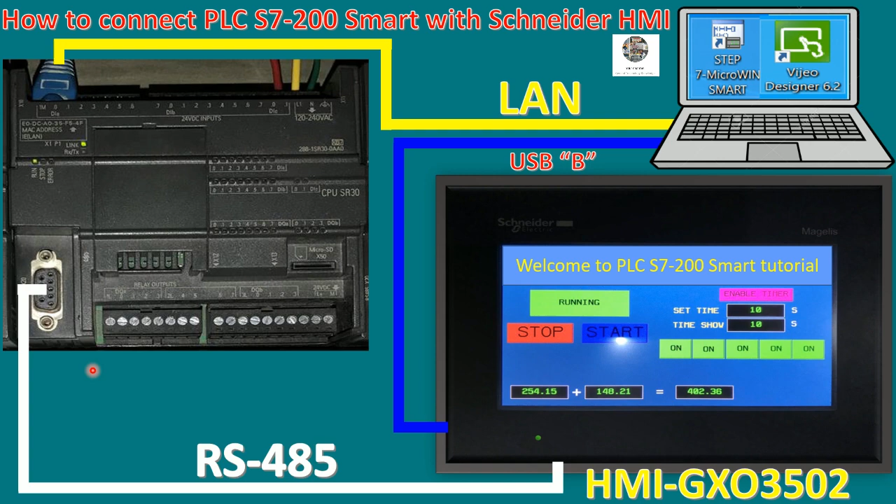For pin number 5, it is the ground, so we can connect with the resistance, and we use only 3 cables.

The first one is the ground cable, number 5, which we connect to number 5 on the HMI Schneider side. For this pin we use pin number 4 connected with pin number 8.

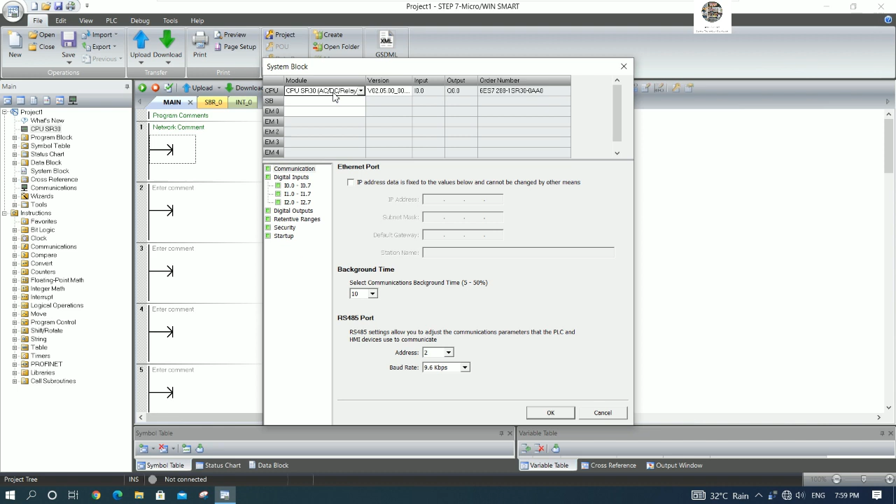Basically we can go to the CPU tab and then go to the startup tab and choose the run mode. There are 3 options we can use: the first one is last, the second one is run, and the third one is stop.

If we choose stop like this, it means that when we turn off the power and turn it on again, the CPU will not run. So if we choose run and then download the logic or setting to the PLC, when we power on, it will run.

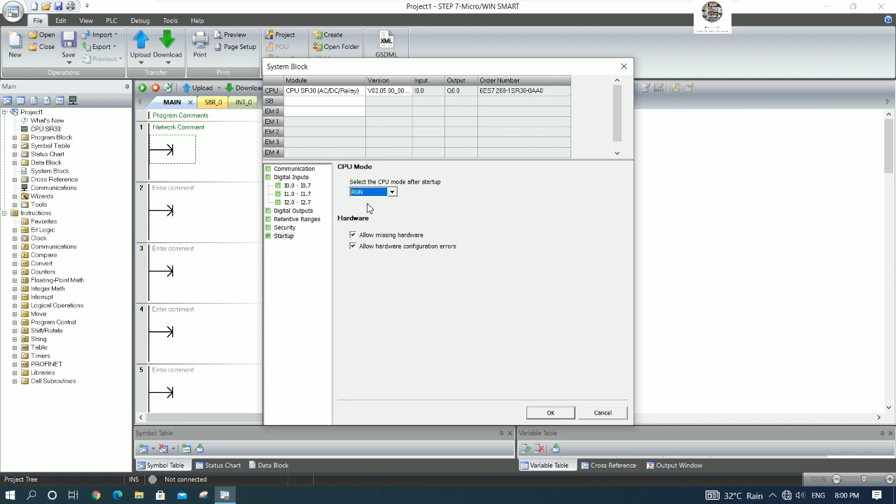For the last mode, it means the CPU will remember its last condition. For example, if the last condition is stop, when we power on and choose last, it will stop. When we choose run, it will run. So it means the last mode remembers that. For me, I recommend using run mode.

Then we can connect the LAN cable. I will connect the LAN cable from my PLC using the Profinet port to my PC, then go to communication and choose the correct network card that we already installed. I will choose the gigabit network connection, which is the network card of my PC.

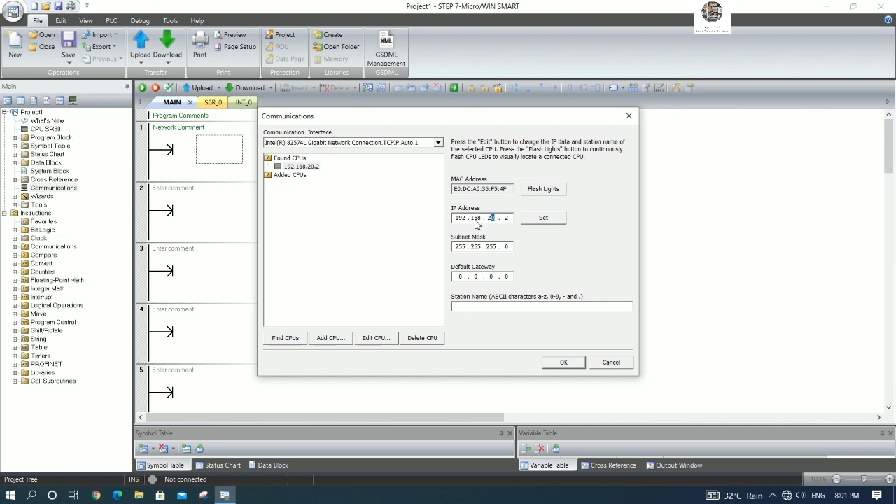So it detects 192.168.20.2. If we would like to change the IP, we can use edit and change it to another IP that we want, but right now I'm not changing the IP.

So we need to put the IP address of our PC to be the same range as the PLC. So I will put 192.168.20 dot something, but not dot 2, right? Because the PLC is dot 2. When we put dot 2, it means it conflicts with the same IP as the PLC.

So I will put 253. Push the tab key on the keyboard, and it will give us the subnet mask 255.255.255.0.

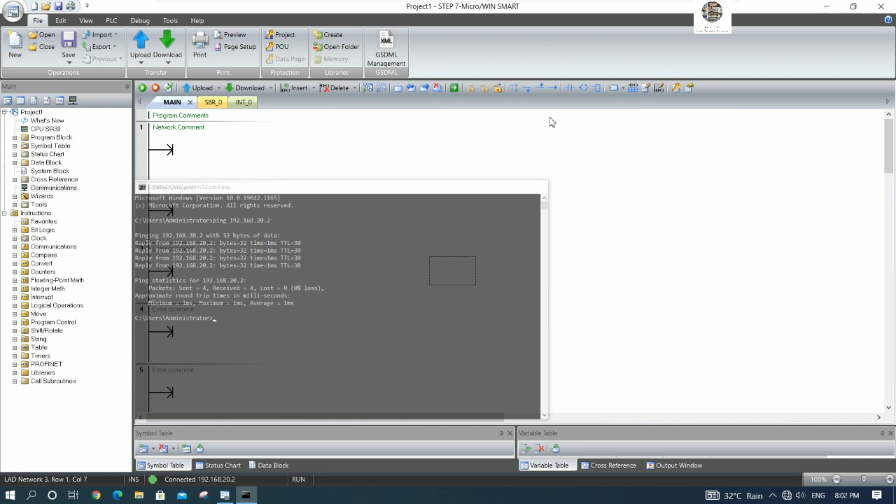After that we can click OK, and then we can ping 192.168.20.2. It's like this - it means that we can connect, or we can communicate between our PC and the PLC.

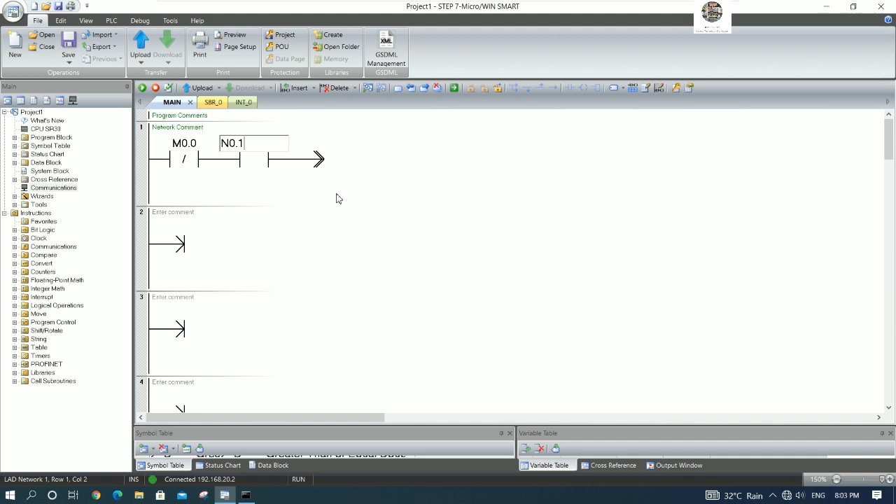So we can create a sample program to test with our HMI. The first one I will use NC M0.0 - sorry, this one should be M0.1. And I will turn on the output Q0.0. So this one is start.

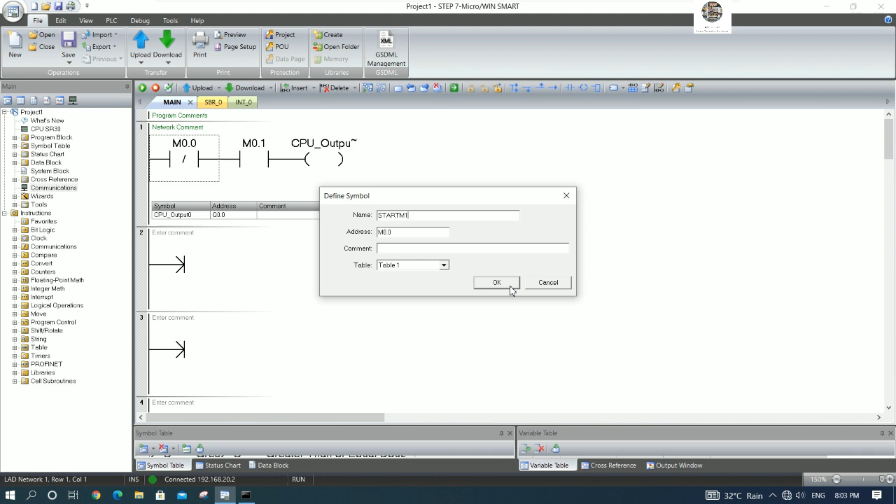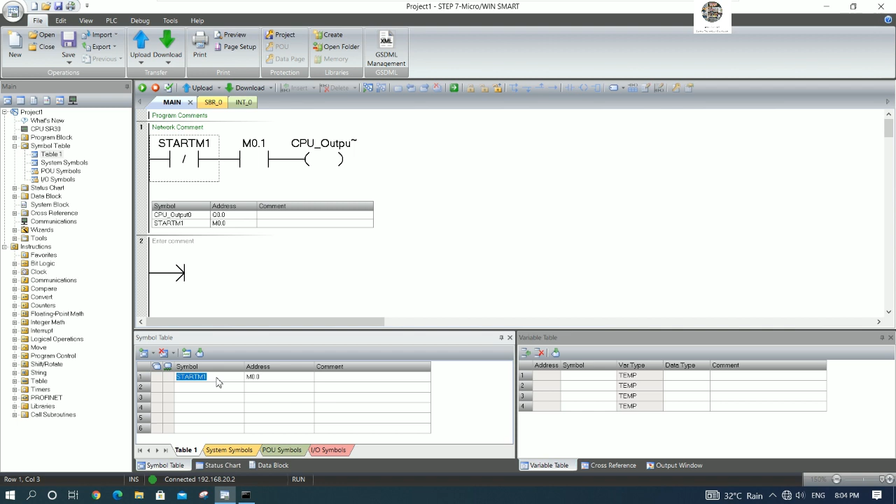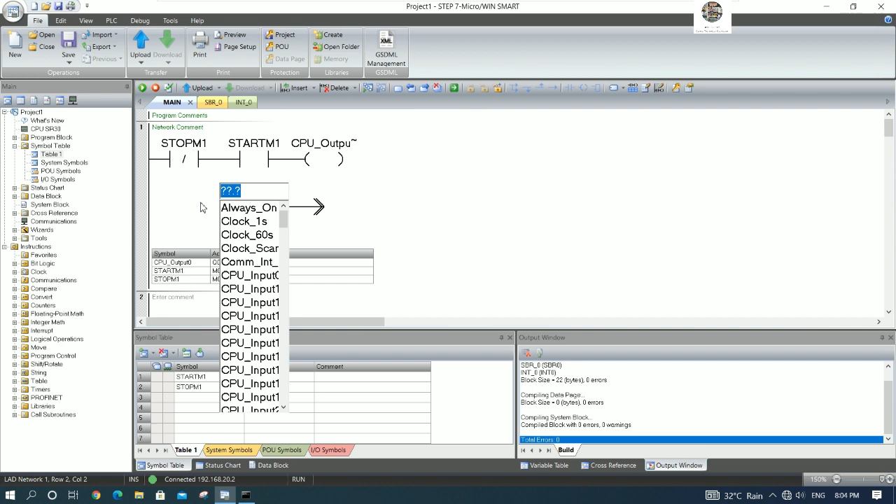So this one I will put start M1 - sorry, stop M1. We can go to the symbol table and then change stop M1, and this one start M1. Okay, and we can compile. Error 0. And then I will hold the signal by Q0.0.

And then we can save the project - this one, example PLC project. And then we can push download to download our logic to the PLC, and we can go online.

So we need to create a sample project for the Schneider HMI and then download it to the HMI for testing. Let's go open Vijeo Designer version 6.2. Then we can create the new project. I will go slowly so everyone can understand.

Push next, and I will insert PLC Smart HMI. Copy and push next. And here is the target name - I will put PLC Smart HMI connection.

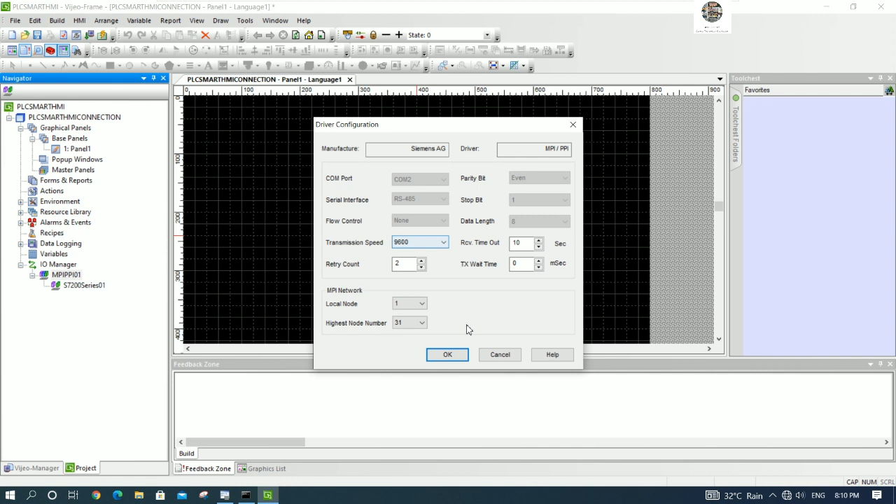This we can use default, so we can click OK. This setting is very important - if we choose an incorrect setting, we cannot communicate. First we need to know how to wire the connection, and second we need to know about how to use the baud rate. Right now I will choose 9600 for communication, and then we can go create the variables.

Go to variable, and then the first one we need to choose the boolean for the stop button. I will choose boolean, and here we can rename it, example stop M1. This is a scan group, meaning the driver that we already chose, and here is the address. So address we can use M0.0, right?

Next step we can use boolean, add one more boolean, example start M1, and the address is M0.1, right? So M0.1, you can choose this one, M0 bit 1. Okay, and the next we can use Q0.0 for motor number 1.

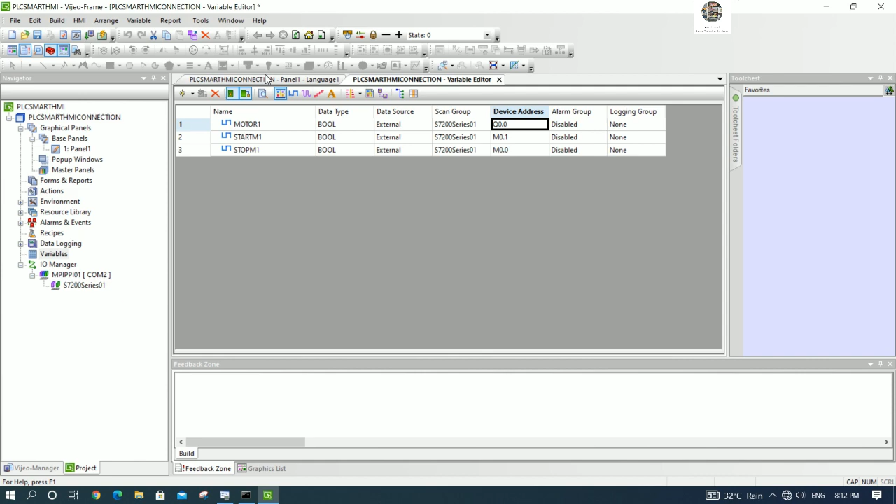So we can choose boolean, example motor 1, and then we can use Q0.0. Okay, and we can go back to our screen. And here we can change the color, another color that we want.

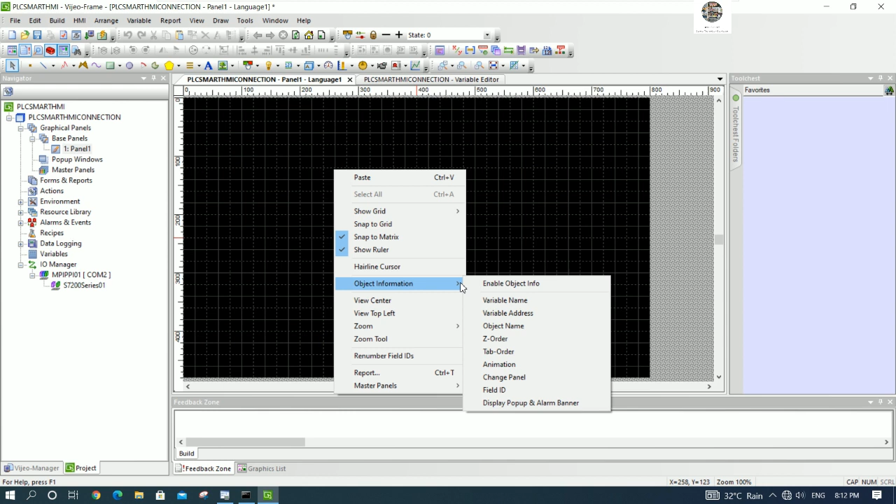So we can go to property. We can go to property, object property, right? Screen 1. And we need to set the download target that we would like to choose. So go to general tab and then download.

Here we choose USB. If we choose file system, it means that we can download to the USB flash or some drive that we want to download to our HMI. Okay, so right now I will use USB type B.

So it has one more option, and it is very important here: Include editor. It means that when we already create the project and choose like this, we can download to the HMI and then upload the project from the HMI back to our PC. Okay, so I recommend to tick this one. Next time we can upload back or back up the project from the HMI.

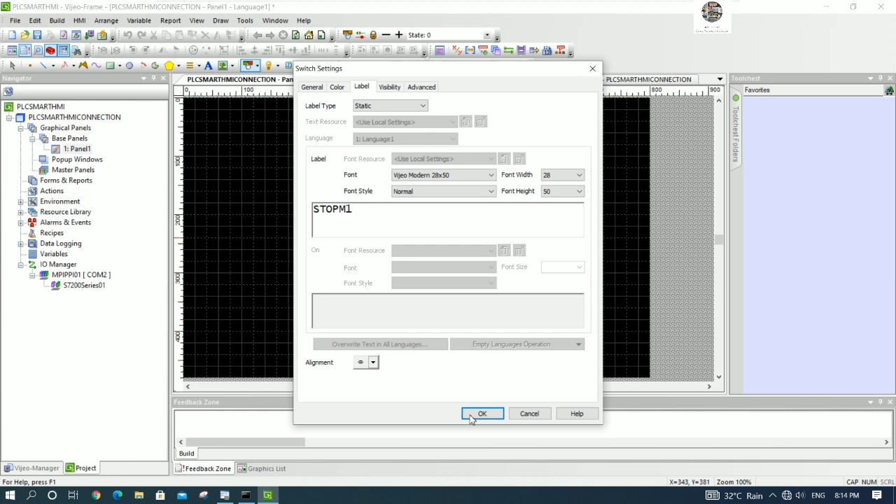Okay, and then we can go to push button, right? So let's go to switch. Label, example stop, stop M1. I will use this font size. It's very big, right? So we can adjust.

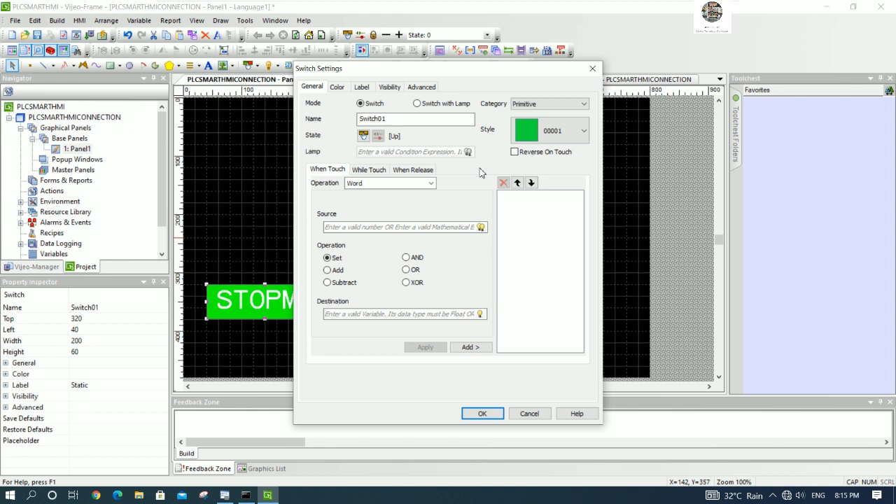Okay, stop M1. We can go to property, and then change the platform. Example, we use this color, we can go to change the color, right? For text color, I will use black. And fill color, I will use red because it is a stop button.

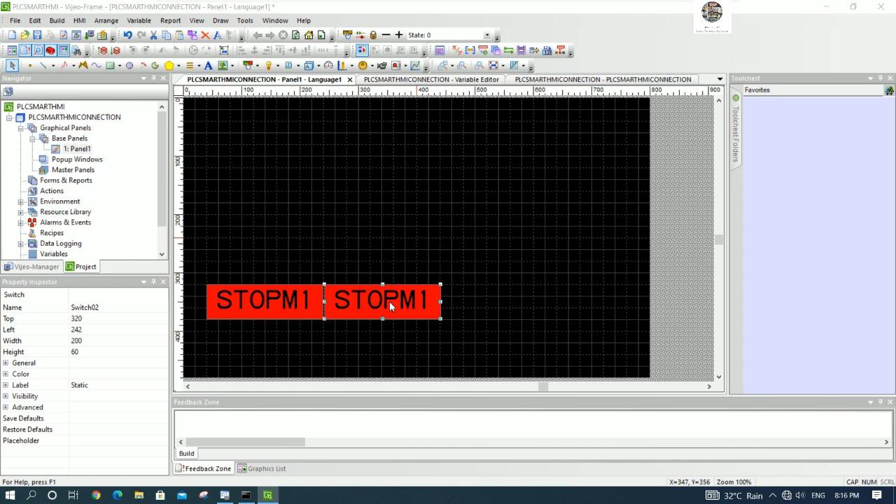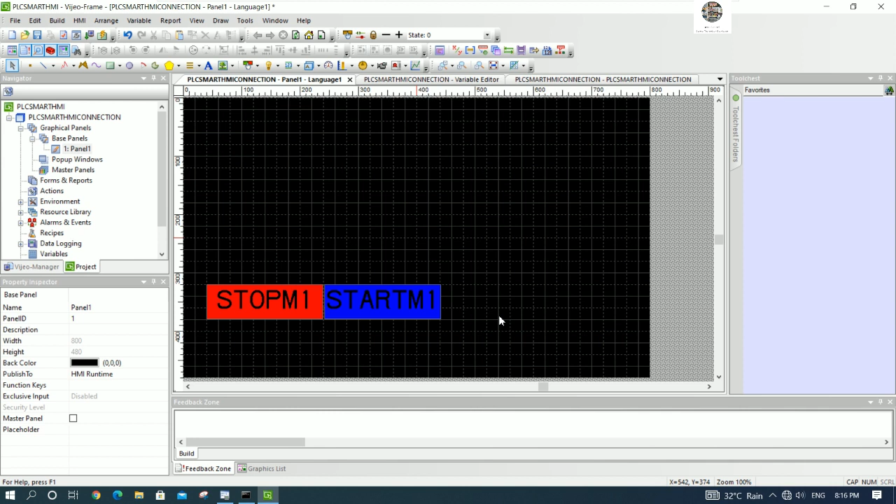And we can copy one more for the start button. Okay, start M1. We can change the label to start M1. And then I will change the color to blue. So we can change to blue. And for the background, we can change to another color that we want. I will change to this color.

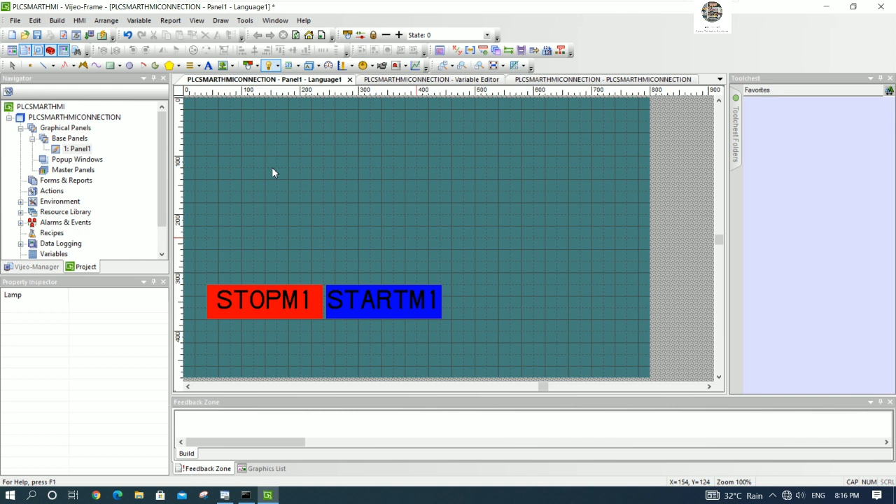And then we can use the rectangle to show the status of M1. Example, I will choose like this. But sometimes we can use the lamp, like this, to show the status. If we okay it like this, it will show like this. So we can change the color: when off it will be red, and condition on it will be green, like this.

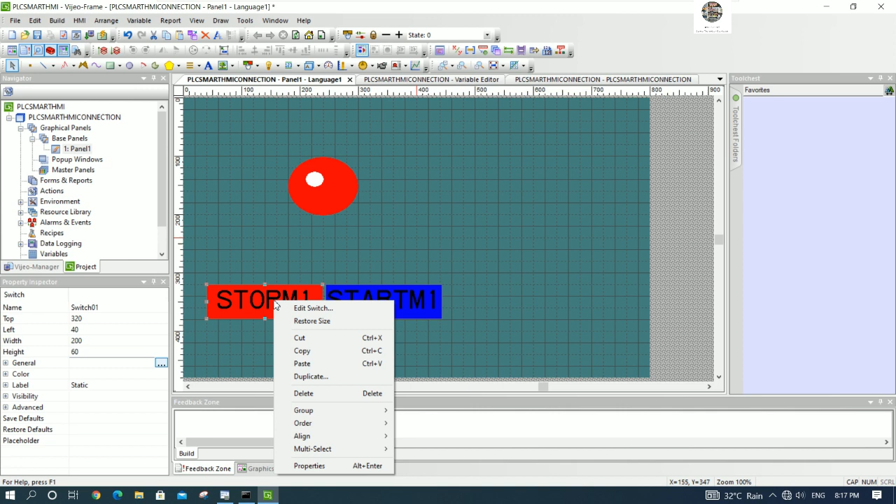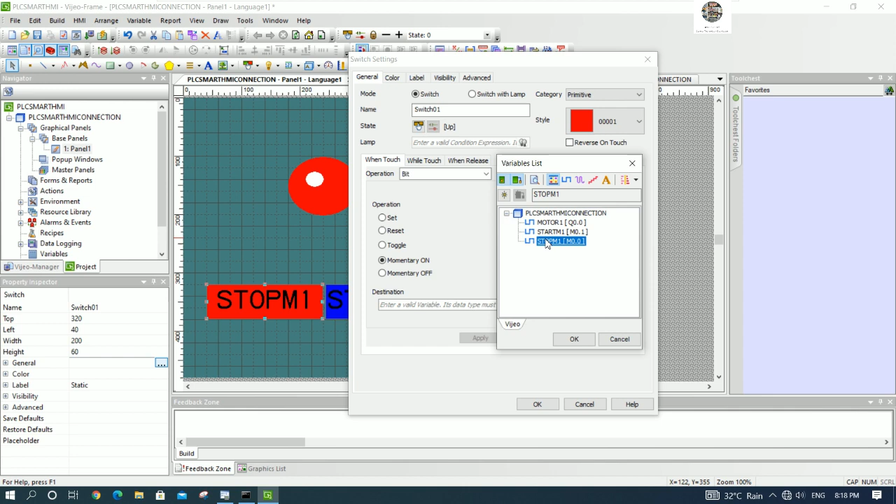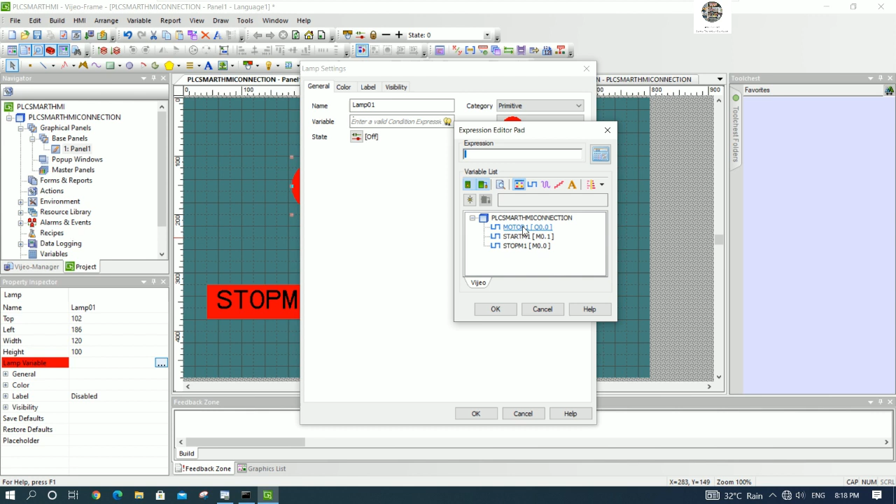Okay, so it is the motor M1. So we need to configure the start and stop buttons, right? We can go to property, double click, and then choose bit and choose momentary on, because we need to turn on, and go to destination, and choose the stop, right? And for start the same, we can go to bit, momentary on, start, and for this motor we can go to variables and choose motor one.

Okay, and then we can compile, right, and simulate before downloading to the HMI.

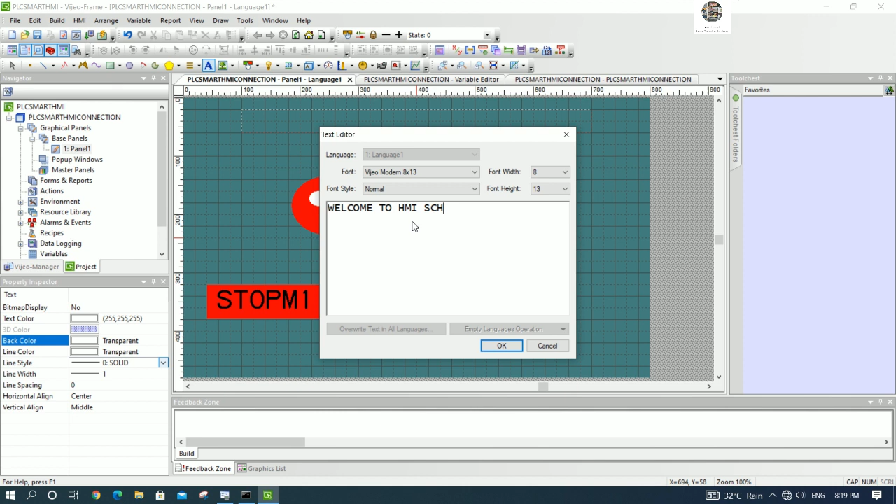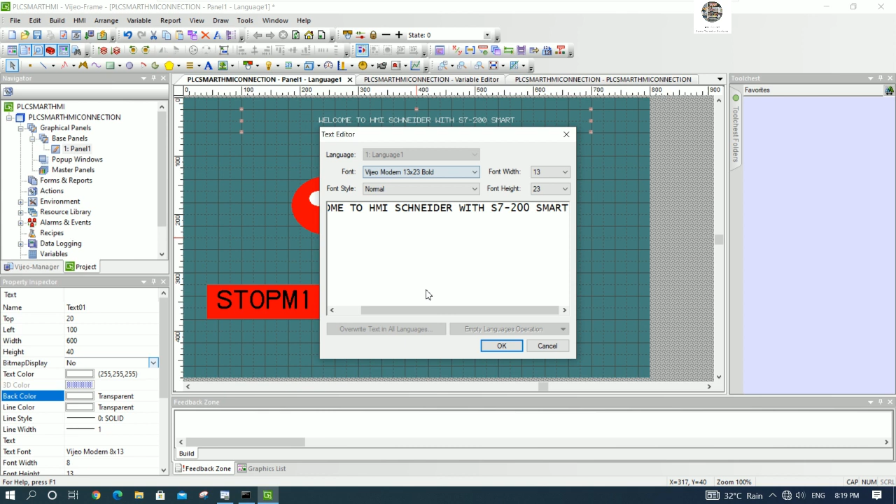So I will choose text. Okay: welcome to HMI Schneider with S7-200 Smart. Okay, and then we can change the color or change the font size that we want.

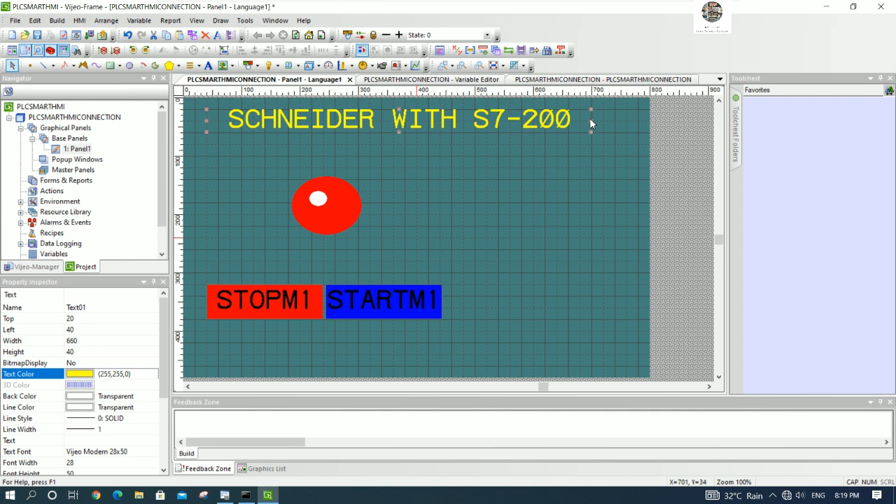The text color I will change to yellow. So big, right? So we can adjust. Okay, like this.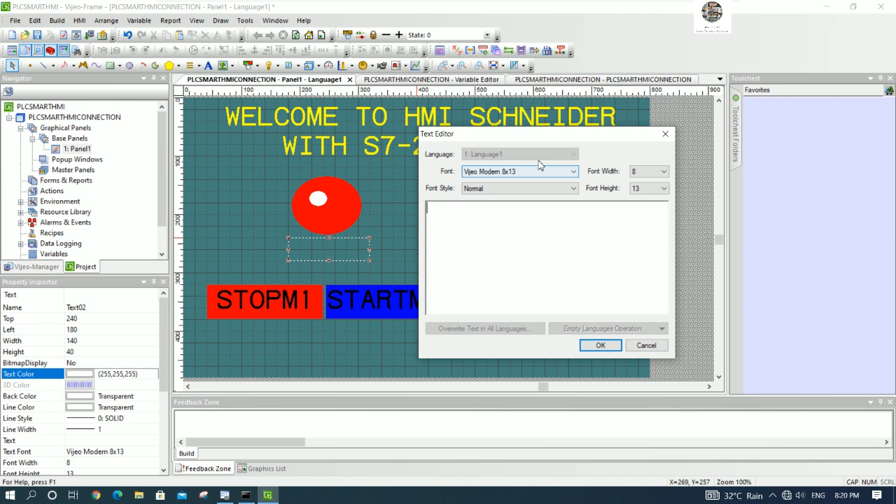Then this one should show the status of the motor, right? So I will choose the text. For the label, we can use the text, right?

Okay, here we can write the option. When the motor stops, we can show stop, and when the motor is running, it will show run. Yes. So we can go to enable the value animation.

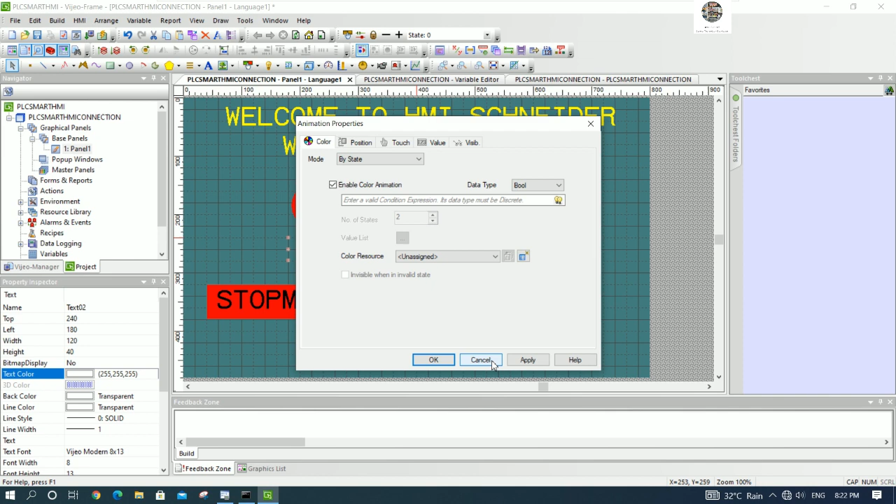Position, enable the position, the color, enable the color, it is boolean, right? Mode by state, by form, free form. We can use the value animation.

Actually we can use the rectangle. Okay, I will use the rectangle. Have option or not? We have size, we have touch, we have visible, fill, right? This one has style also. Actually we can use the text. Let me find the option.

Yes. Stop, normal is stop. And when it turns on, right? When it turns on, it will show running, right?

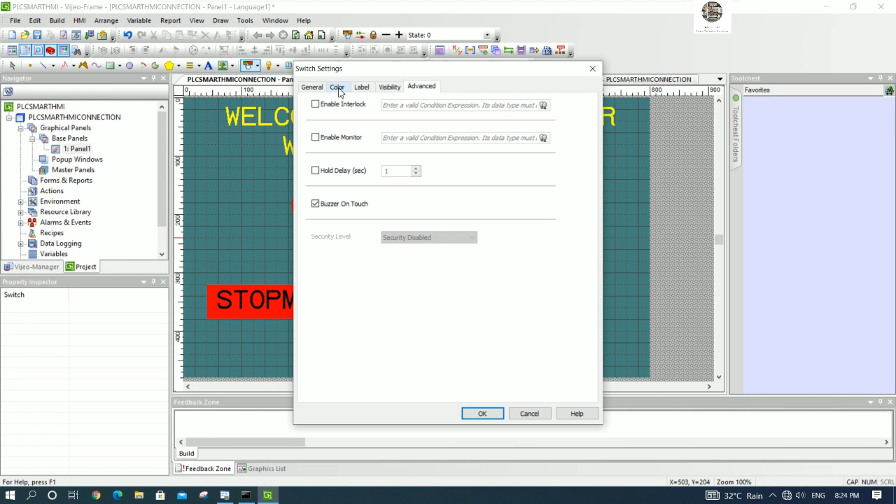Okay, so we can translate the text. I will use the label. Yes. And choose the font.

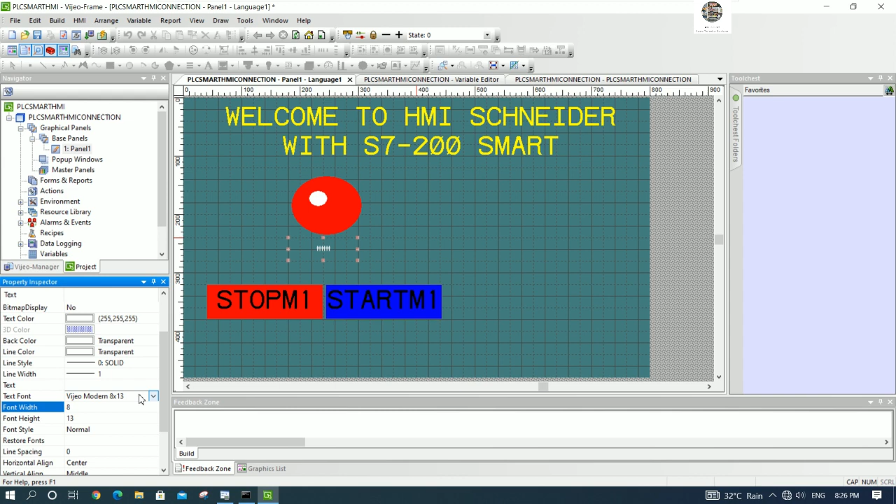It is stop, right? I will choose the font size, increase the font size a little bit. So double click on font size and then choose the value. Enable the value animation and choose the boolean.

Yes, so here we can choose the motor one, to translate the text. So when it's on, I will show the status with the motor one running. And when off, I will show motor one stop. Yes, like this.

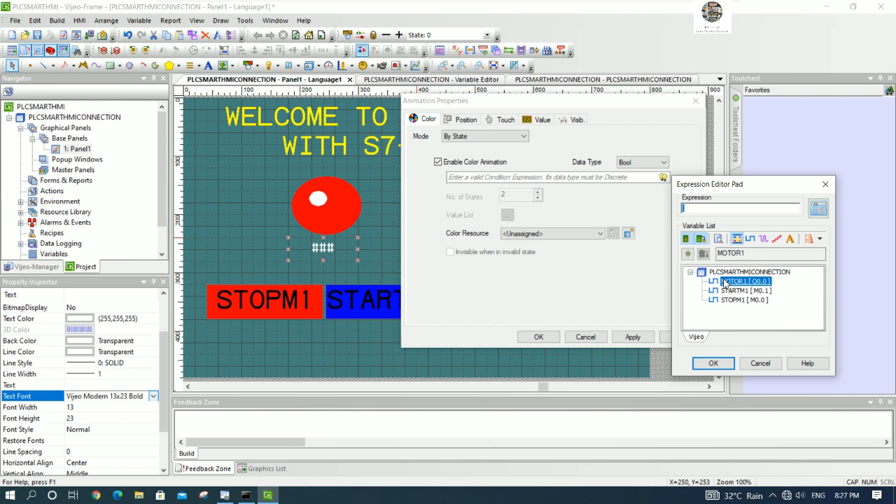And for color, we can choose boolean also. Color animation. Okay, so when off, I will show the text is red color, and when on, I will show the green color. Yes.

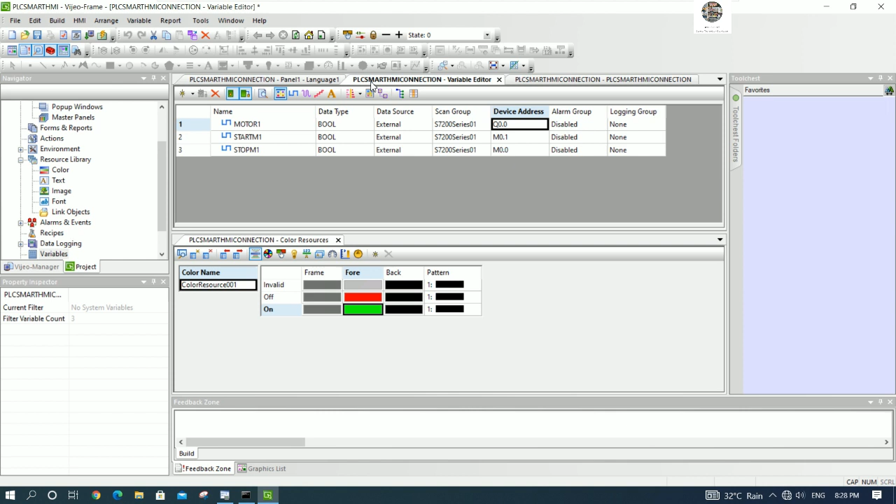And then we can go back to our screen. And then we can save the project and simulation. Yes.

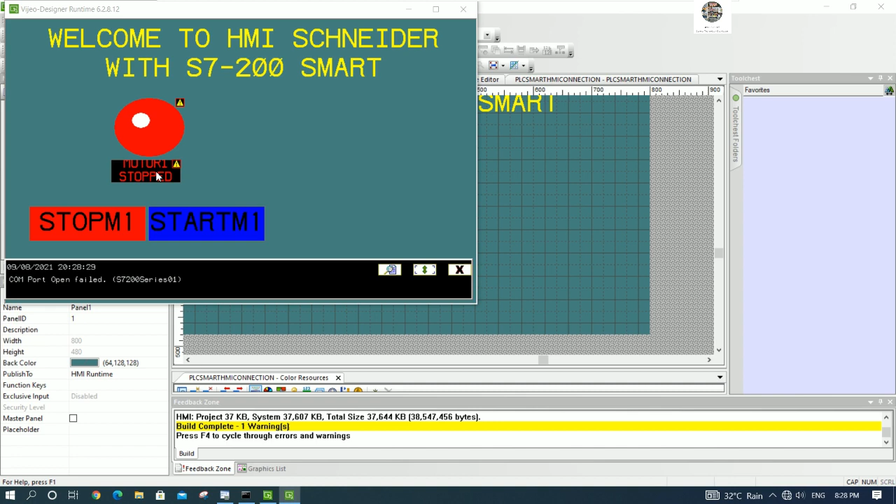Before download to the HMI, we can simulation. So this one is so big, right? So we can adjust the size like this.

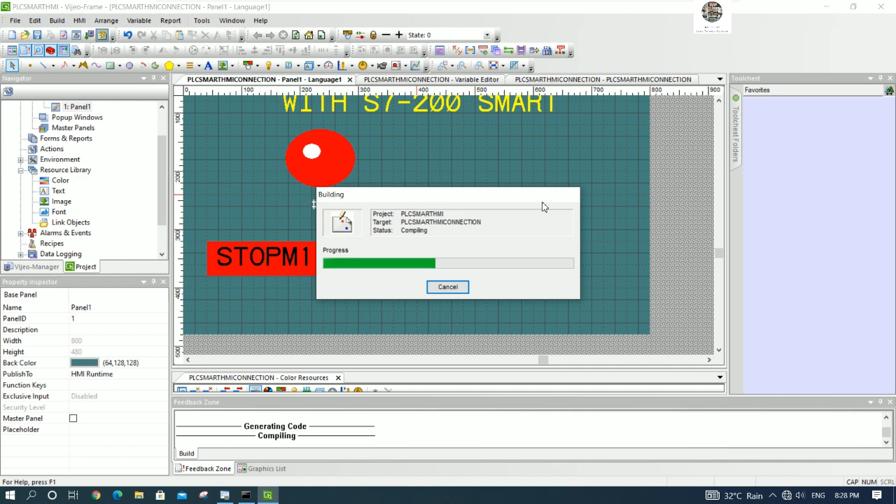And then we can save, and then we can simulation again. Okay, it should be like this. So let's go to download to the HMI.

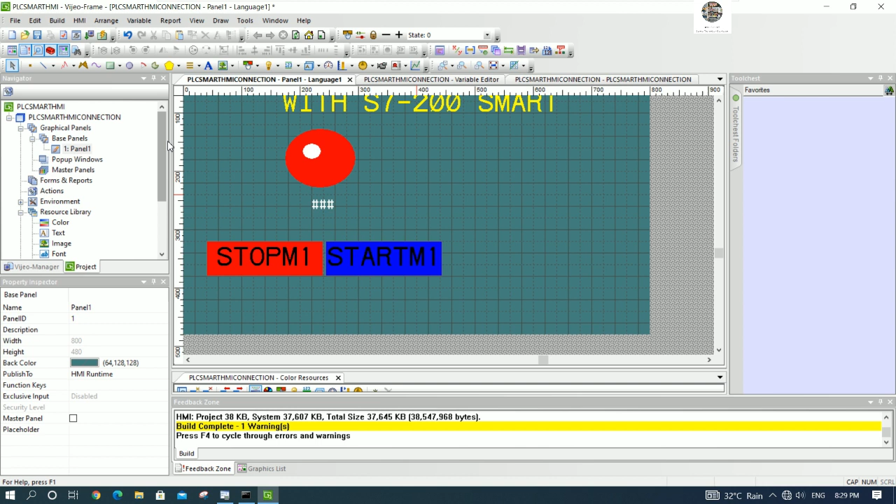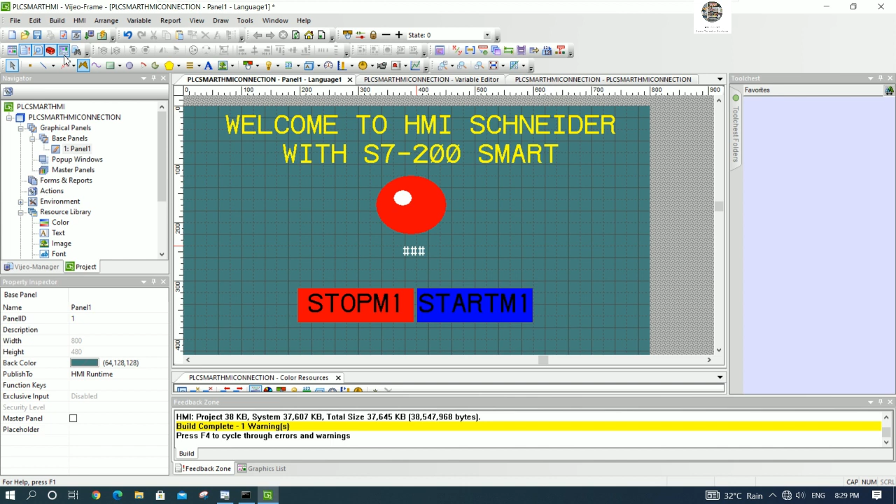So to download the HMI, I will connect the USB Type B from my HMI to my computer. Okay, I will choose Virtual Machine because right now we use Virtual Machine. So I will adjust the position to be center like this. Yes.

So we can push download. It means that download the project to the HMI, yes, to the real HMI. PLC Connect cannot find the defined target machine, right?

So let's check again. Check the driver again. Go to manage to check the driver. Go to device manager.

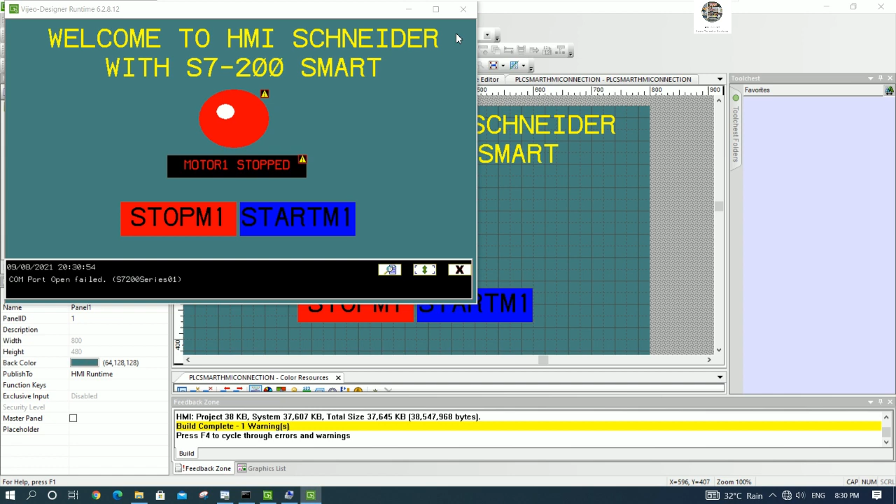Then we can go to try to save the project and then simulation again before download. Okay, and then we can push download again.

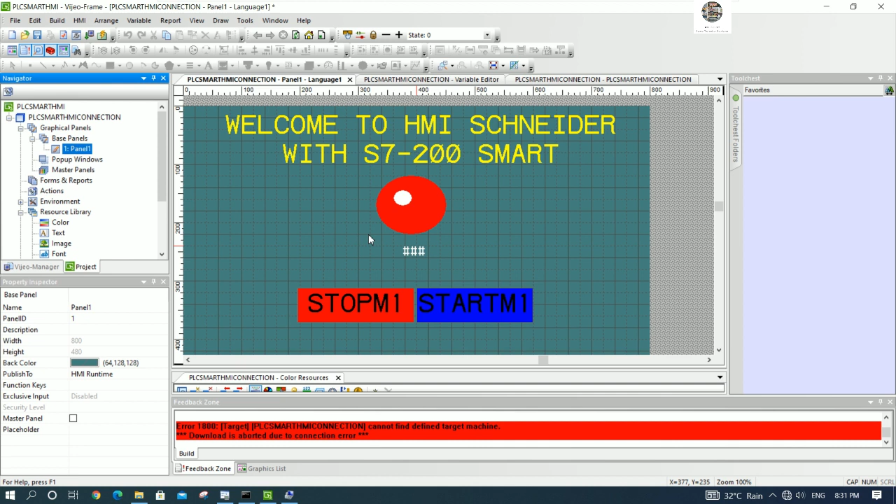It still cannot connect, right? So let me check the HMI again. And then let's try to download.

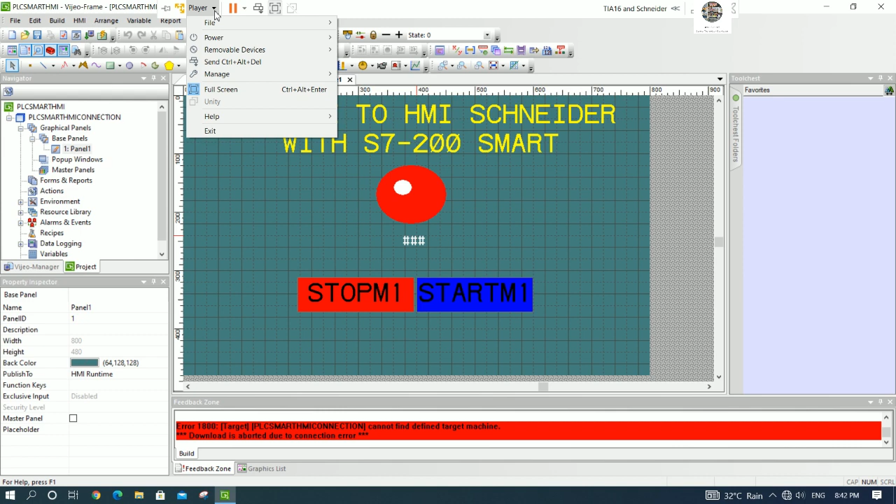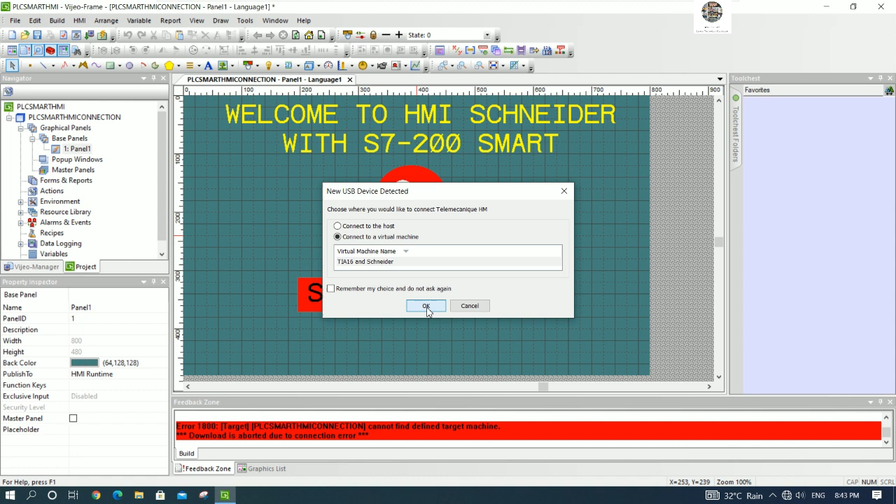Okay, now we can download to the HMI. So I will change the USB to be 2.0. Yes. And then I will disconnect and then connect the USB again. And then we can try to save and then download the project to the HMI again.

Okay, so click yes to confirm download. Yes. We will download the project to the HMI. Yes, so wait a moment for downloading the project.

Take time a little bit to download. After that we can test together. So don't touch anything while it downloads.

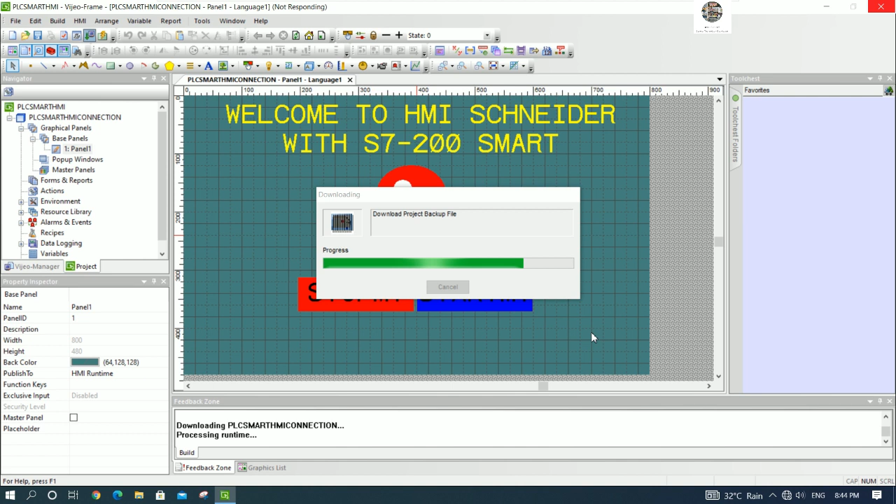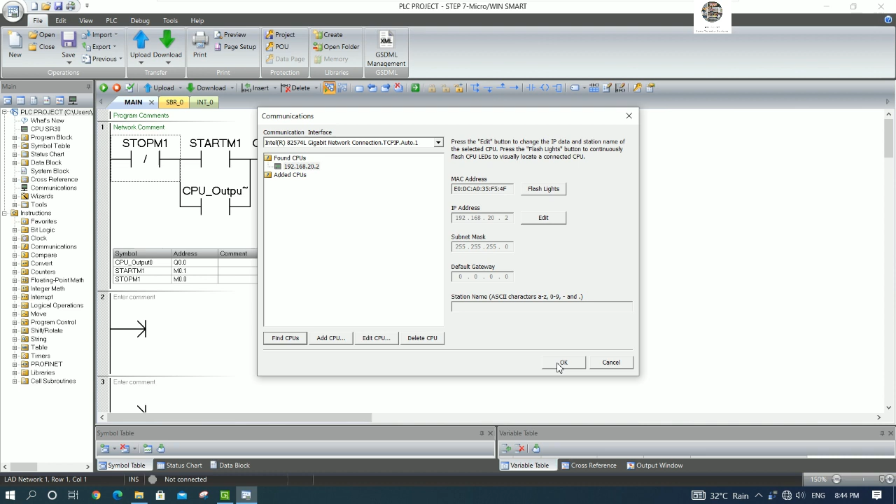Okay, download finished, so the screen is starting up. And then we can go online with our project. Okay, and then we can test together.

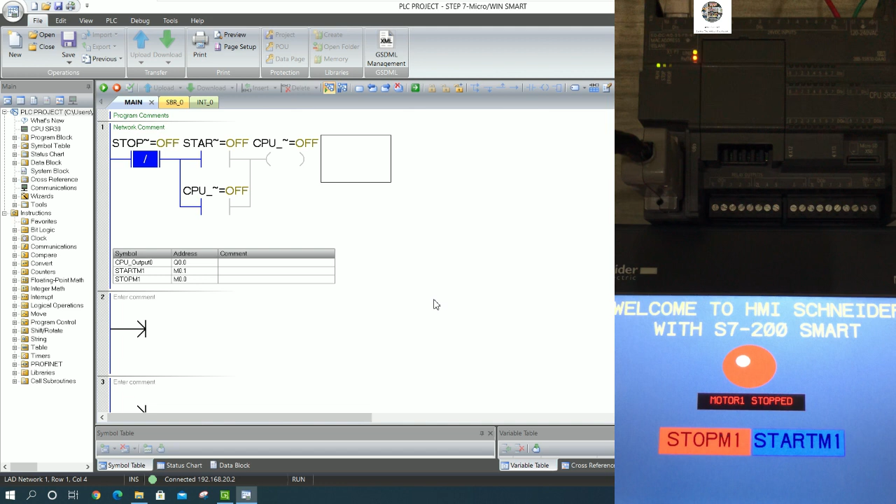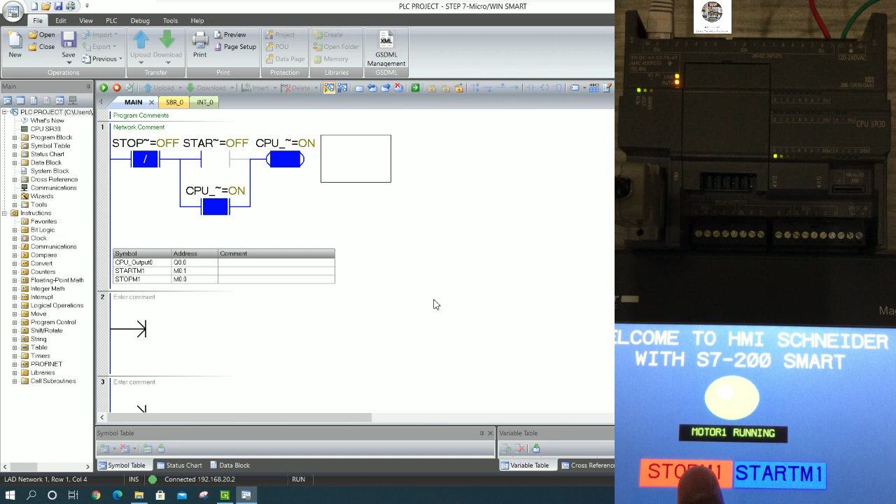Okay, so right now the motor is stopped. So if I push start, okay, the motor is running and the output is turned on. It means that we can connect from this output to the relay or contactor, so we can control the motors.

When I push stop, it will stop. Start again, it will start again. Yes. So the condition is stop. This one is running. Yes. So it works perfectly between HMI and PLC. Yes.

And then we can continue to write with another motor. Example, we can go to M0.2, M0.3, Q0.1, and then we can hold the signal by Q0.1. Yes.

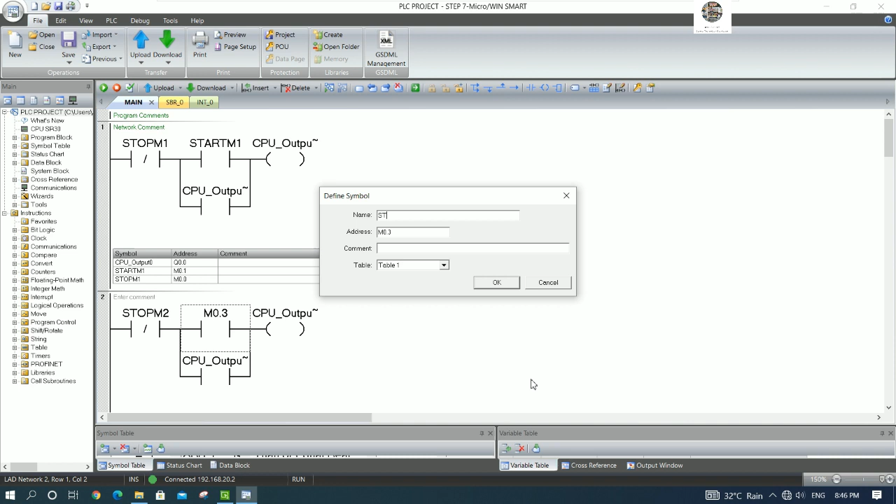And here we can define the symbol. Example, stop M2. This one start M2. Yes. And then we can save the project and then download to the PLC. And run the PLC again, and we can go online.

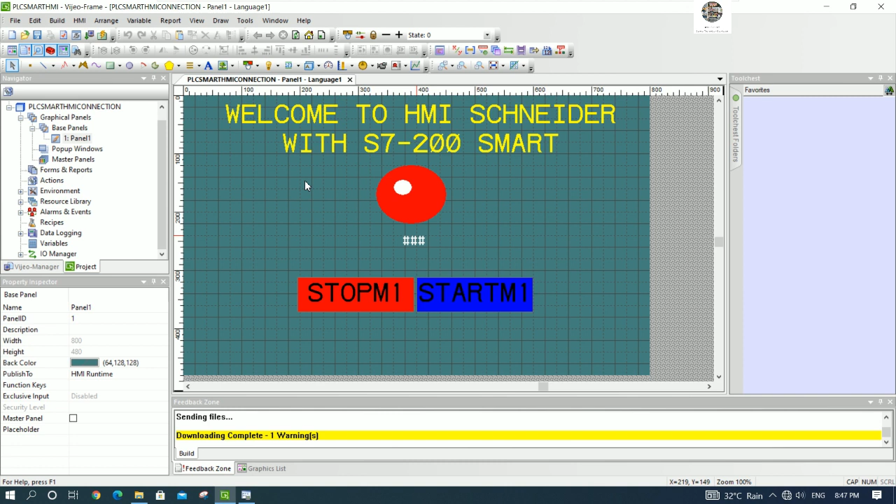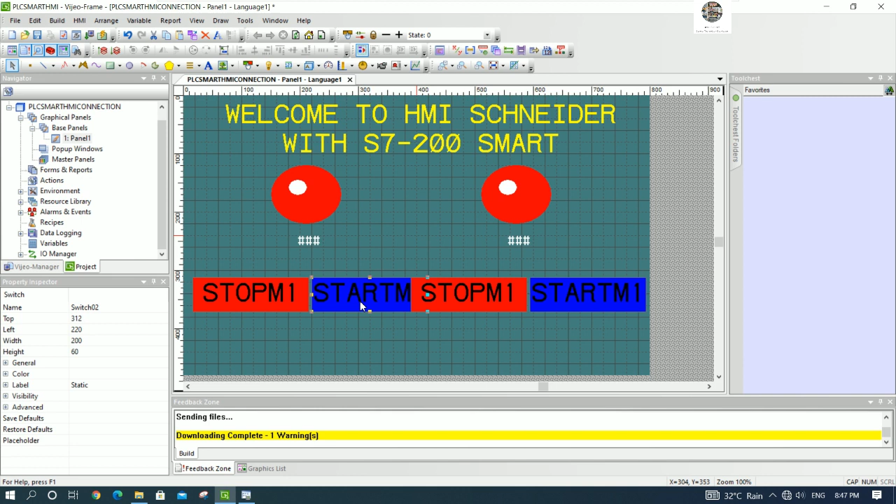And we need to add more variables to control the motor number 2, right? So I will adjust. Okay, and then we can copy for motor number 2. So right click, copy, right click and paste. We will get like this for motor number 2. And then we can adjust.

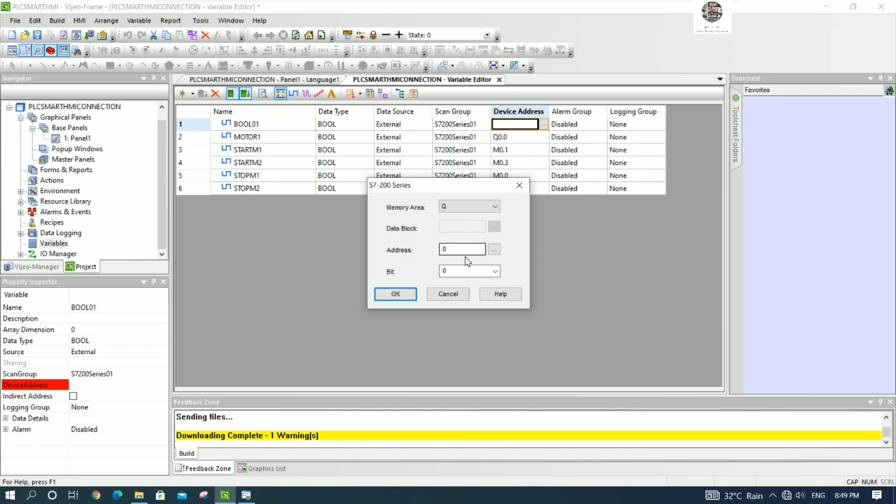Okay, like this. Save the project, and we need to create new variables for this motor. Insert the boolean, for example stop M2, address M0.2. And one more, start M2, address M0.3. And one more for M2 command, Q0.1, boolean. And this one, motor 2.

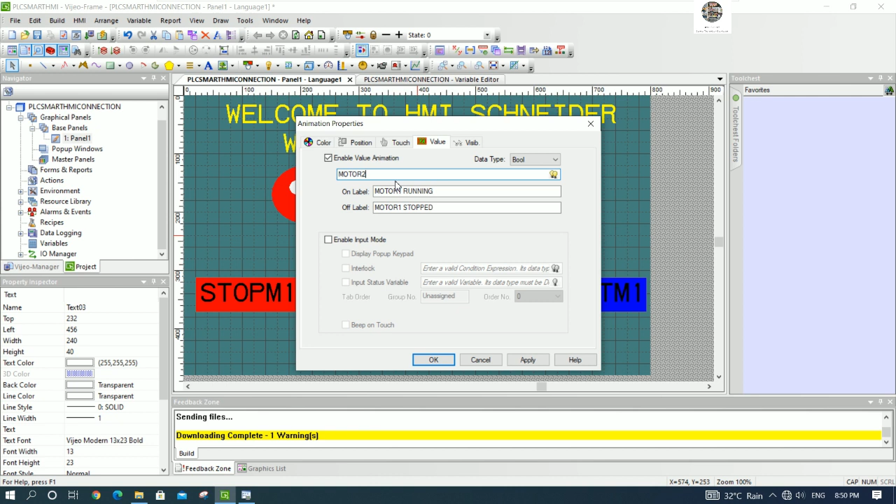Yes, and we can go back to our screen. For this one, we can go to property or double click, and then change the general, and go to stop M1. We can change to stop M2, and this one we can change to start M2, and for this one we can change M2, and value here we can change M2, and here we can change M2, and here we can change M2, and for the status of M2 here we can change M2.

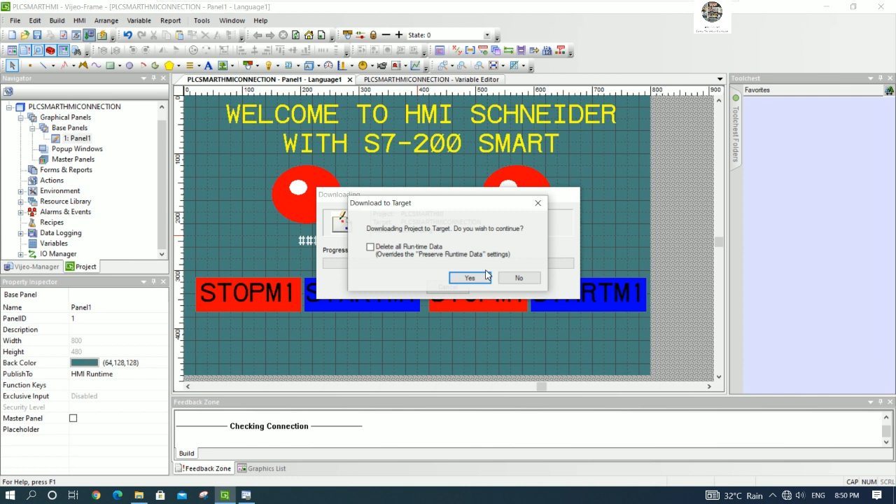Then we can save and simulate before download to the HMI. Okay, it will show like this on HMI when we download. Yes, so we can save and then download the project to the HMI.

Oh, we need to change this one to be M2, right? Okay, go first, and then we can change the button description again, and then download again. Yes, so let's go first.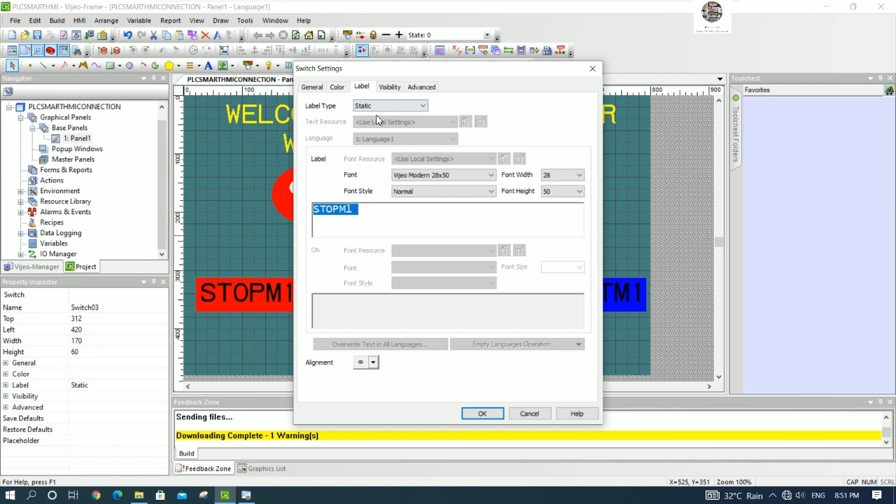So it will take a bit of time to download the project to the HMI. Okay, finish. So I will rename this one to stop M2. This one start M2. Yes, save, and then we will try to download again.

So wait a moment more for downloading the project to the HMI again, yes, to confirm. Wait a moment for downloading the project to the HMI again, and we can test together after downloading it.

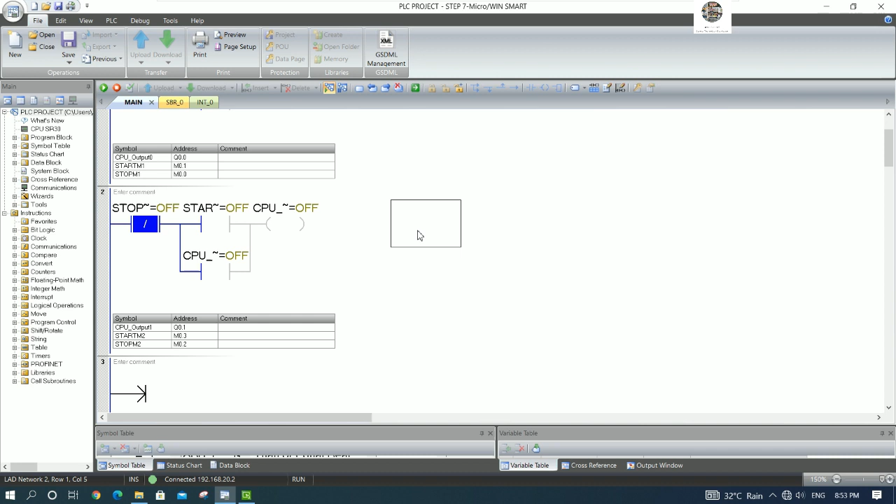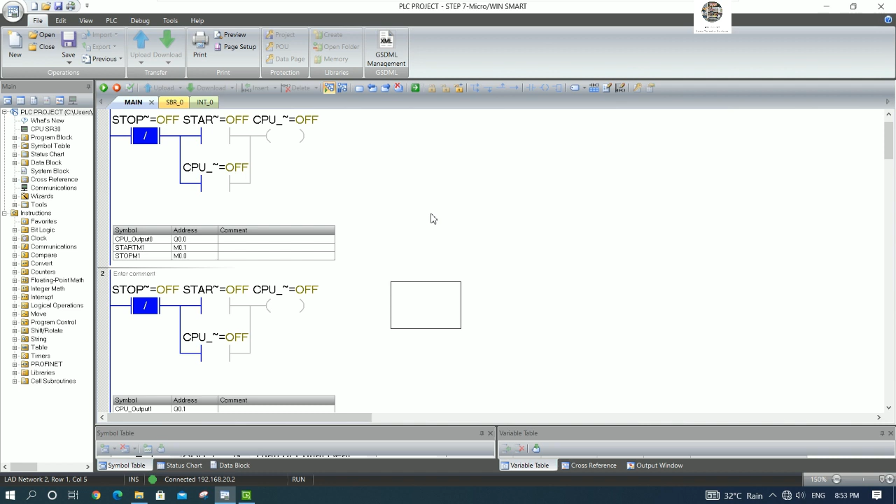Okay, finish. So we can go to our PLC project and then go online and check the status when we push the button motor number 2 and motor number 1. Right now we already downloaded the project from our PC to the PLC and to the HMI. So if I push start 2,

Q0.1 is turned on, and the status is green, yes. And for start 1, yes, it worked for Q0.0, and we can stop. We can stop also. Yes, so it worked perfectly.

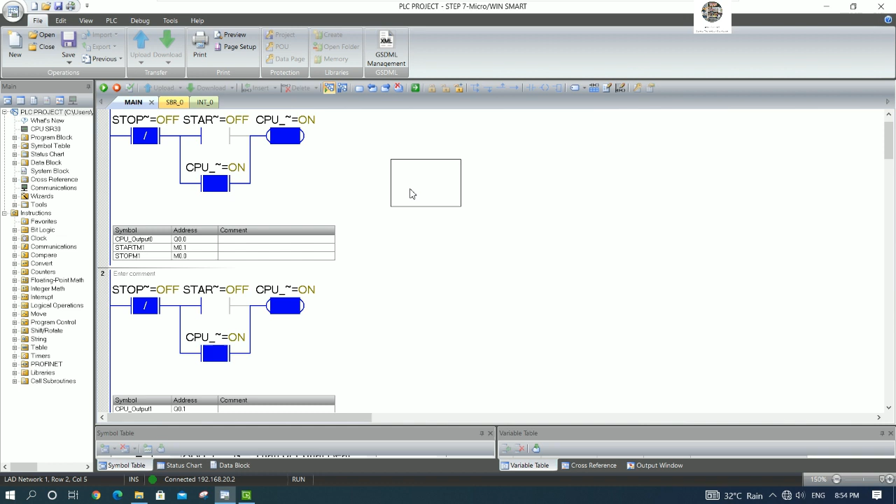So this is just an example about how to connect the PLC S7-200 Smart with the Schneider HMI.

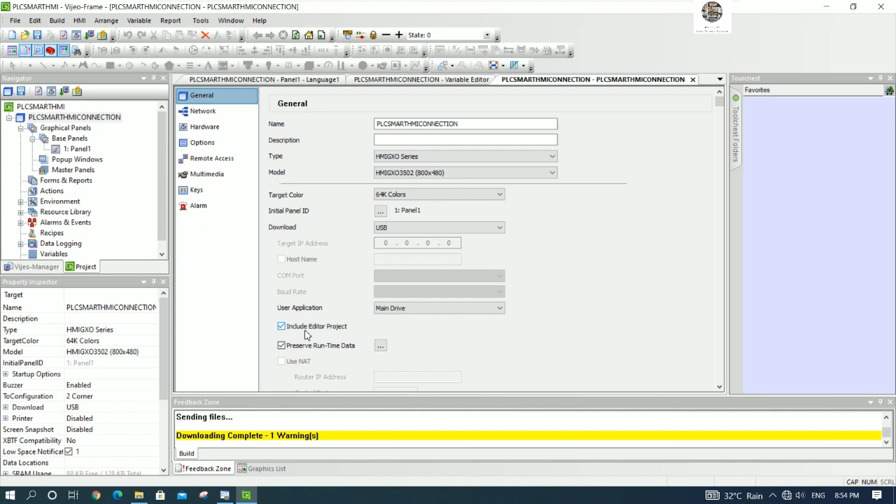So before going to the end of this video, I would like to share this a little bit. As I show you, if we tick like this, the checkbox, we can upload from the HMI. Let me save the project first, and then I will close all the project, and we try to upload. So we can go to Vijeo Designer, and I will upload this project from the HMI.

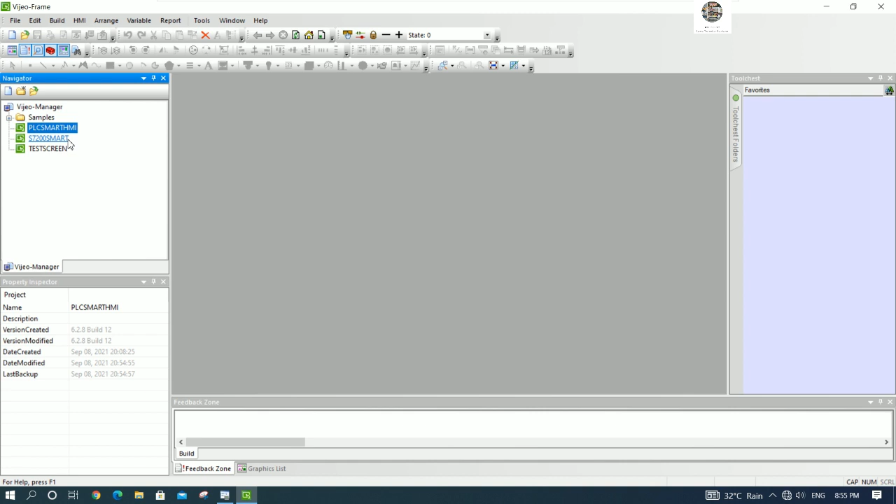Okay, I will create the new project, or we can cancel the project. So first we need to save and delete the HMI, because when we upload it will duplicate the project. So I will delete all the project first.

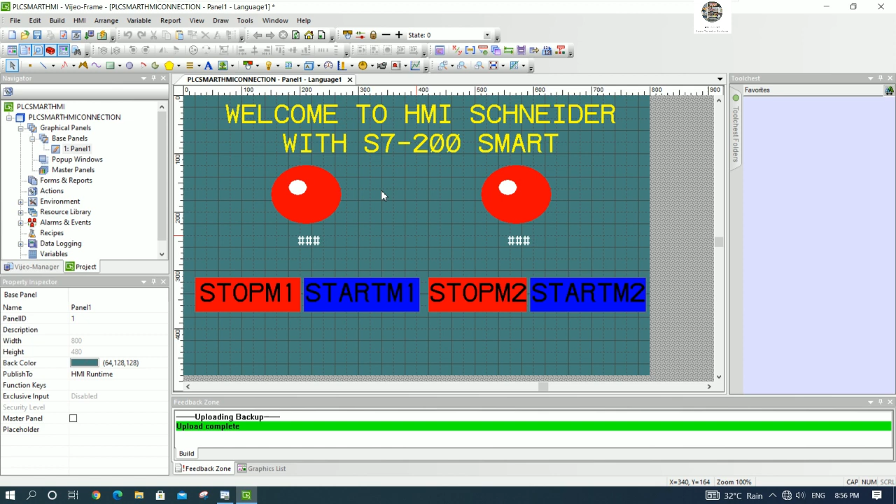Okay, and then we can try to upload the editor project. Click here and choose USB, because right now we use USB. And we choose main drive because we upload from the HMI. Click OK and wait a moment for upload. Yes, upload complete, right? And then we can open the HMI. We will get the original project.

Okay, so that's why I show, if we would like to upload the project, we must check this box before we download the design screen to the HMI.

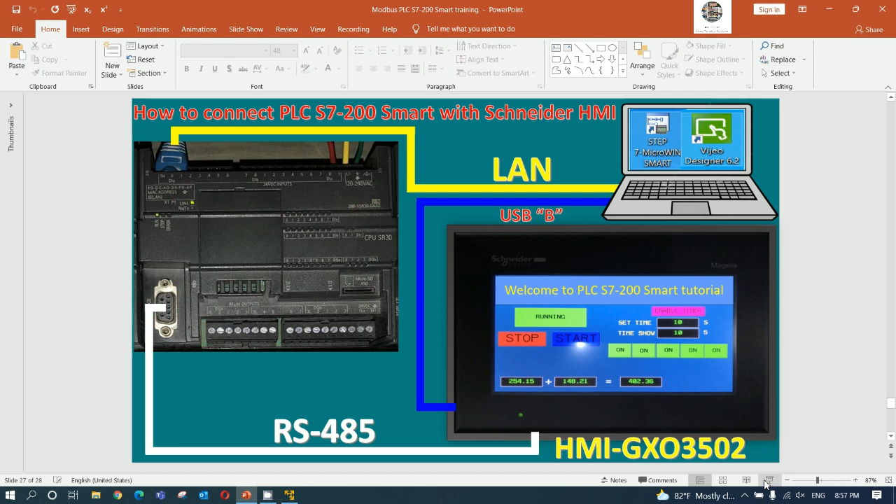And the main objective of this project is this connection. If we cannot wire the connection, we cannot communicate, or we cannot control the data from the HMI to the PLC. So it is very important for the connection of this pin. That's why I explained this pin assignment with the resistance.